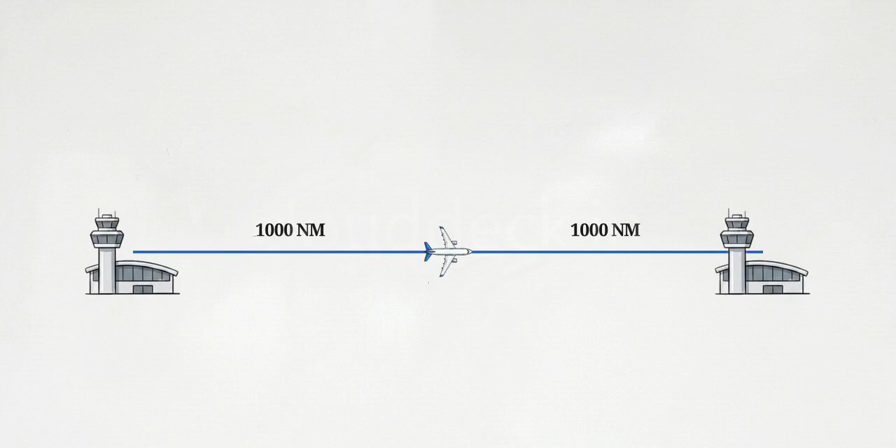You are exactly halfway across an oceanic airway in a twin jet when your left engine fails. You must divert immediately. Because the geographic distance to departure and destination are identical, you face a hard mathematical choice: turn back or push forward.

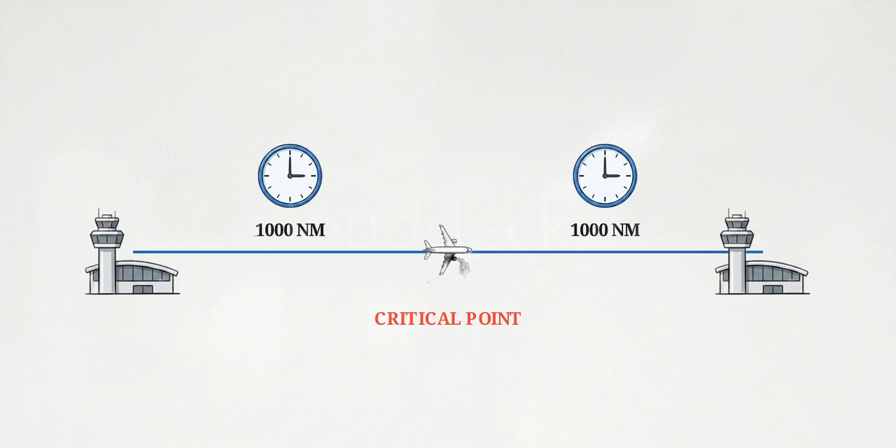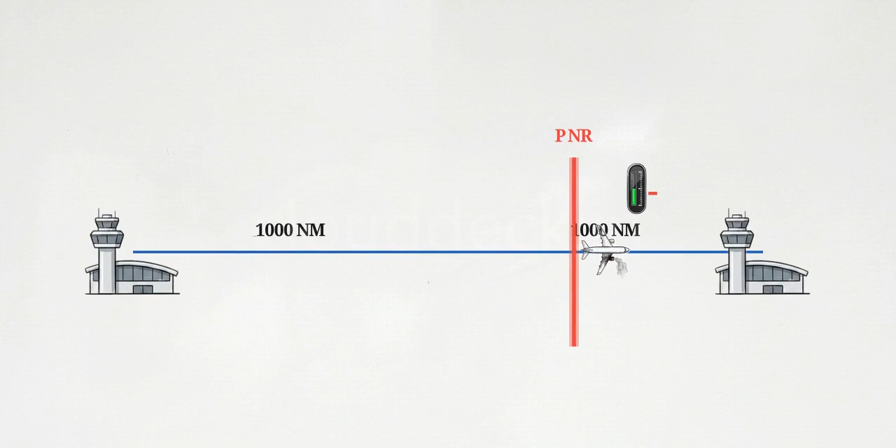To answer that, we calculate the critical point, the fastest path to a runway, measured purely in time. But time is only half the equation. The point of no return is your physical limit based strictly on fuel. Cross this boundary, and returning is impossible.

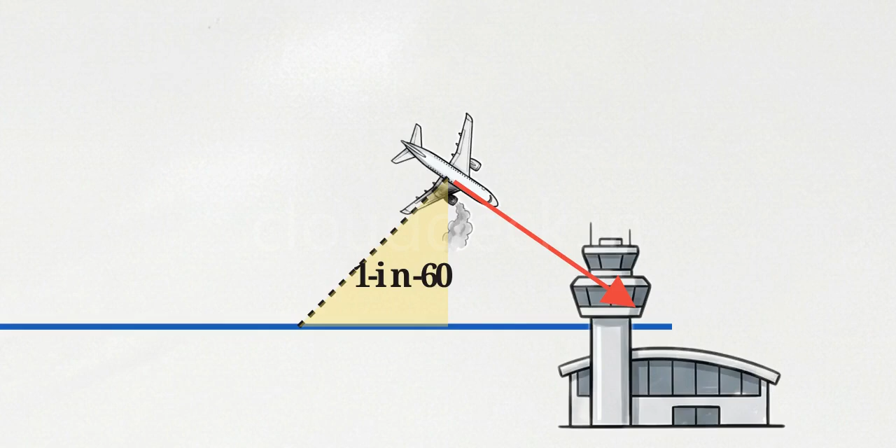If you drift off course during this emergency, you will need the 1 in 60 rule. This calculation gives you the exact heading correction required to get your aircraft back onto the safe track. Passing the DGCA air navigation exam requires executing these 3 frameworks flawlessly. Confuse a time limit with a fuel limit under pressure, and you fail.

This is the formula for the critical point. To find the geographic distance to this point, you only need 3 variables: the total route distance, your ground speed outbound, and your ground speed homebound.

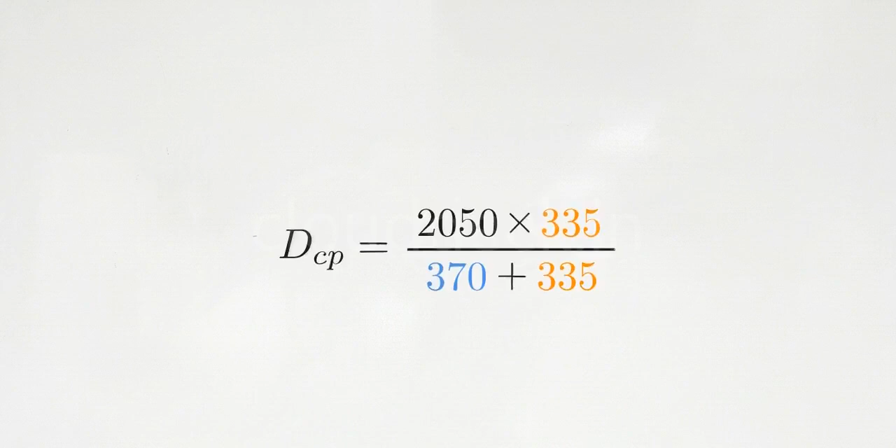Let's test a 2050 nautical mile track. If an engine fails, your outbound ground speed drops to 370 knots, and your homebound ground speed becomes 335 knots. Plug those numbers in, and the math places the critical point exactly 974 nautical miles from your departure.

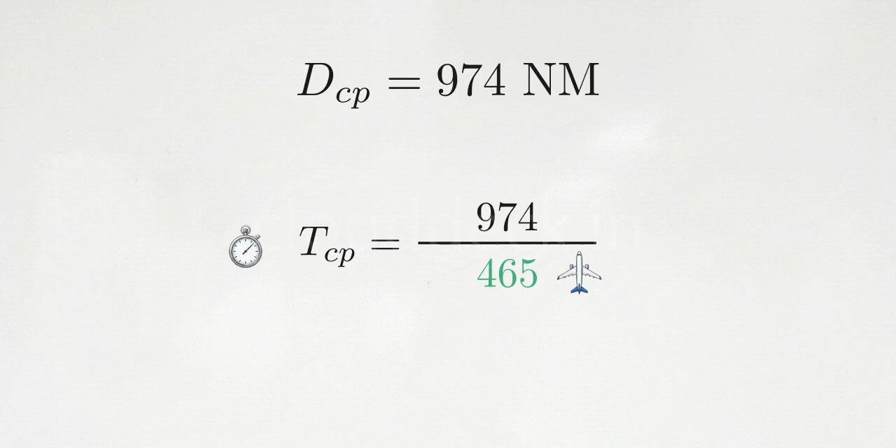Here is where the DGCA examiners lay their trap. They will ask for the time it takes to reach that critical point. Do not use your reduced engine-out speed. You divide the distance by your normal all-engine ground speed, because both engines are running perfectly fine until the exact moment you reach the failure point.

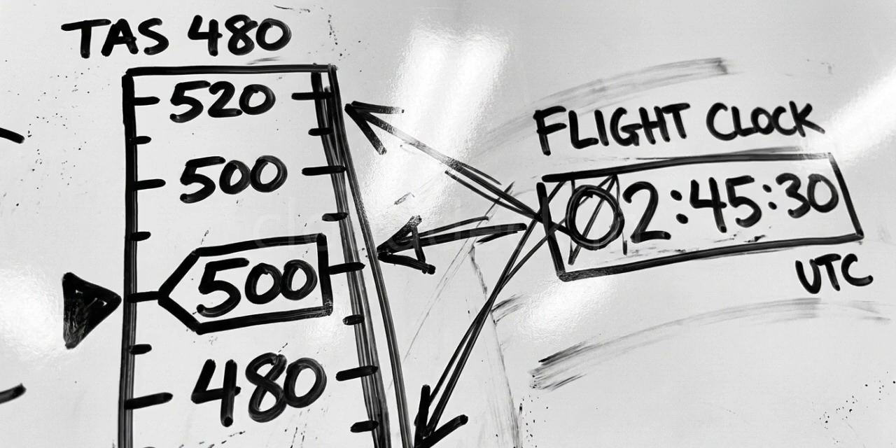The critical point requires you to calculate distance based on a failure that might happen, but calculate time based on the healthy aircraft you are currently flying.

Now look at the point of no return. Before you can determine how far you can fly, you have to calculate your safe endurance. This calculation contains a strict fixed reserve trap.

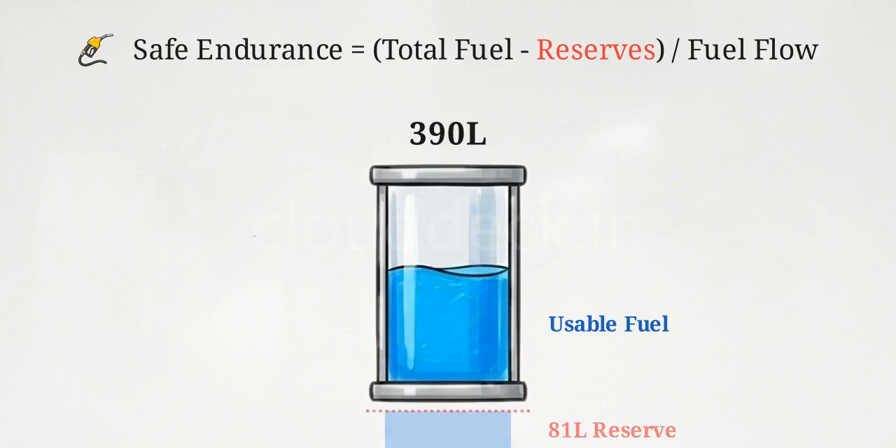If you have 390 liters of total fuel and an 81-liter mandatory reserve, you must subtract that 81 liters before you divide by your fuel flow. If you skip the subtraction step, your math will tell you that you can fly further than your legal fuel allows. This fuel boundary is highly sensitive to the environment.

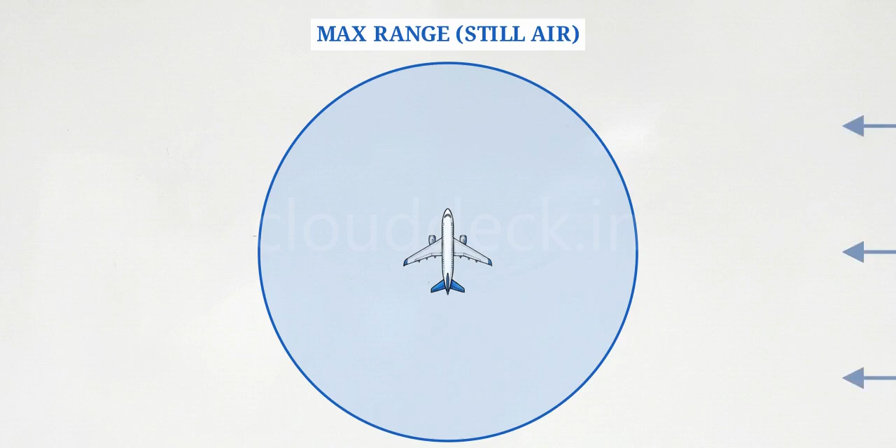The maximum possible distance to your point of no return only exists in completely still air. Any wind at all, whether a headwind or a tailwind, increases the total fuel cost of a round trip, actively shrinking your maximum safe radius.

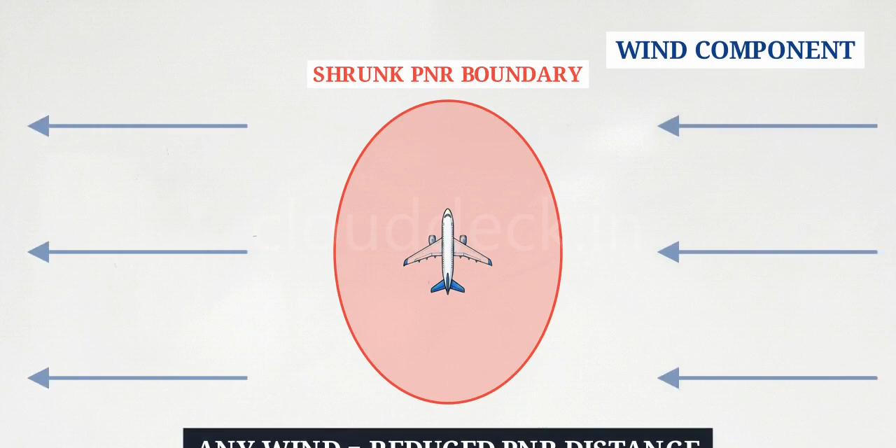Contrast this with the critical point. When a wind shift occurs, the critical point behaves predictably. It always shifts geographically straight into the new headwind. Wind shifts will slide your fastest path to safety up and down your route line, but if you fail to subtract your mandatory fuel reserves, you guarantee you will run dry before reaching it.

When your navigation breaks down, you rely on the 1 in 60 rule. This requires 2 angles: the track error, which measures how far you drifted off course, and the closing angle, which dictates how sharply you need to cut back to hit your target.

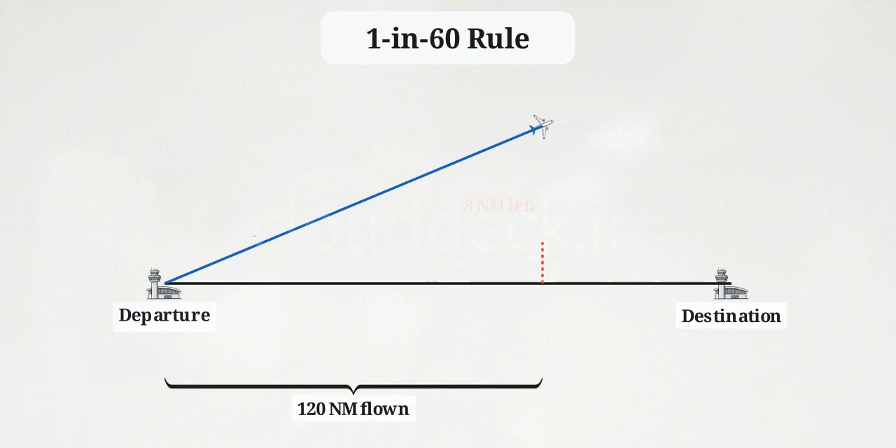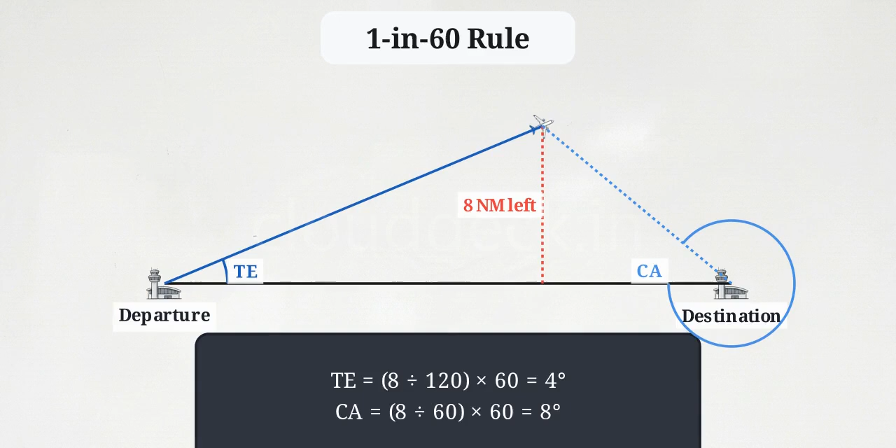Try this scenario. You are 120 nautical miles into your flight. You realize you are 8 miles to the left of your planned track, with 60 miles left to fly. Calculate your total correction angle. Your math should give you 4 degrees of track error and 8 degrees of closing angle, totaling 12 degrees.

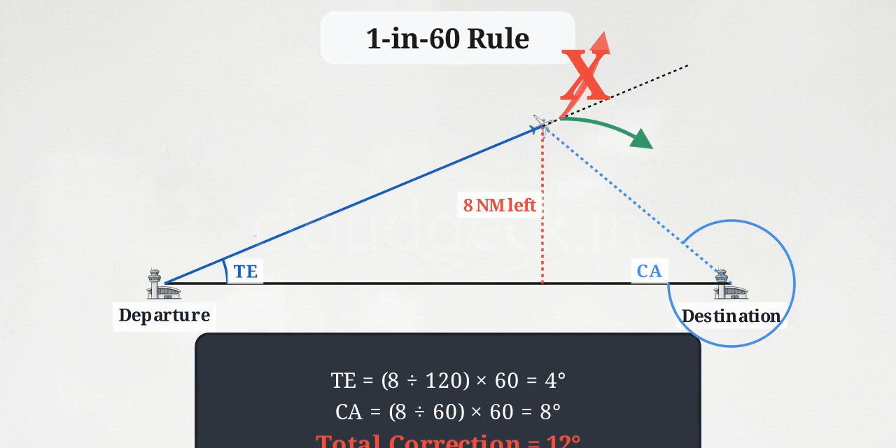But here is the directional trap. Because you drifted left, you must apply that 12-degree correction to the right. Apply it to the left, and you double your error. Generating the right number is useless if you steer it the wrong way.

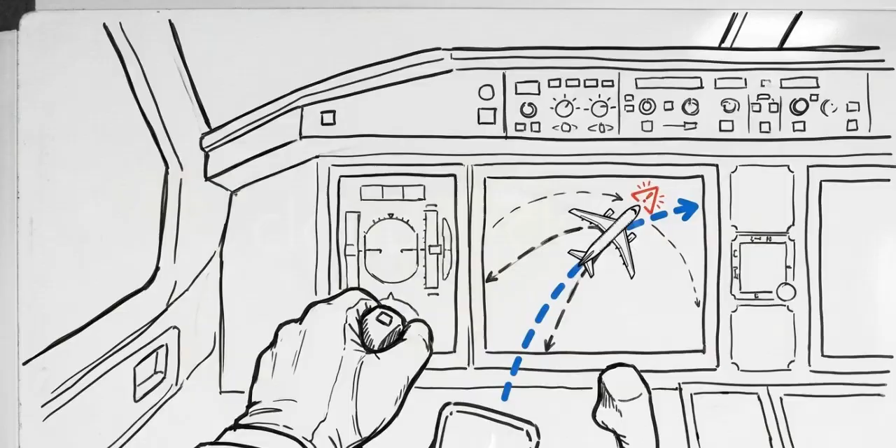The point of no return is strictly about fuel. Any wind shrinks it, and you must subtract your mandatory fixed reserves before you calculate your endurance. For track corrections, the 1 in 60 rule requires you to add your track error to your closing angle, and always turn opposite to your drift.

These 3 calculations make up a massive percentage of the DGCA exam.